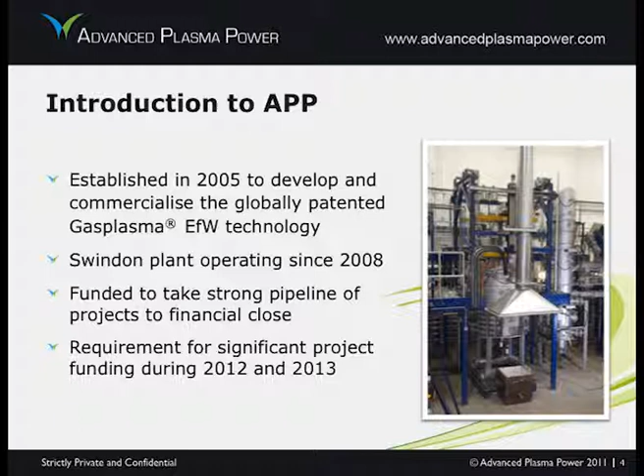Just briefly on Tetronics: it is a leader in DC plasma arc technology, having been established around 50 years ago and supplied some 80 systems globally in a variety of different applications. It has an extremely strong and mature IP portfolio and team of both technical and commercial staff.

Plasma technology, I will come on to explain, is obviously a key component in the gas plasma process, and Tetronics are our supplier for that component.

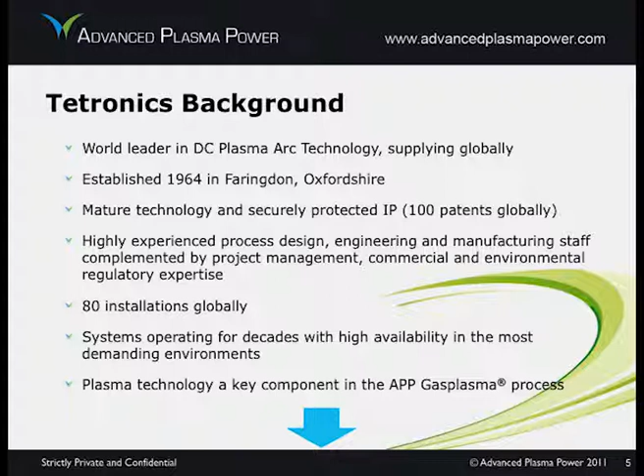The areas of application that the company has focused on historically include, obviously, waste to energy, which is the gas plasma application, but for many decades also the vitrification of incinerator residues, both bottom ash and APC (air pollution control residues, or fly ash), particularly in Japan, which were early adopters of thermal technology but also preferred to vitrify the incinerator waste, thus stabilizing it.

Tetronics has also worked for many years with the NDA and site license companies on vitrifying low and intermediate level nuclear waste, again to stabilize it and make it chemically inert, but also to reduce the volume of the arisings so as to make the material suitable for long-term storage.

Other industrial applications range from very problematic waste such as spent pot liner and organic pollutants, which themselves have an energy content where energy is recovered typically as steam to recycle back into those industrial processes, but also base metal recovery - for instance residues from stainless steel plants containing zinc, nickel, chrome and other heavy metals - to recover those metals as a valuable resource.

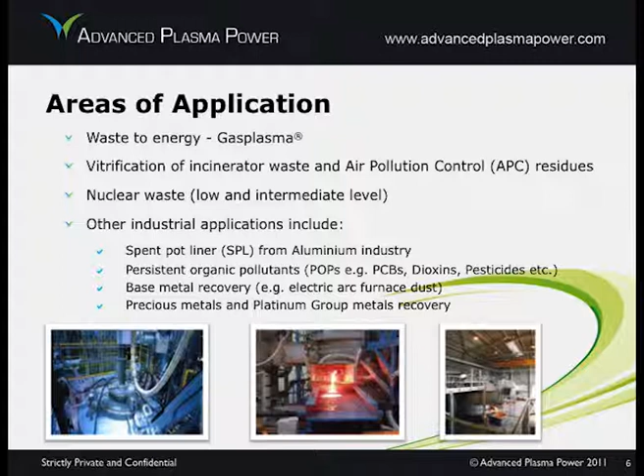Many references exist. So really, in the context of what we discussed earlier, APP and the gas plasma process really aim to address two global challenges. One is what to do with our problem globally of rising residual waste, whilst landfill capacity is in decline and our natural resources are in decline.

As already said, we embrace the shift from waste to resource management, seeing waste as a source of valuable resources, both in a material sense, but also in a fuel sense.

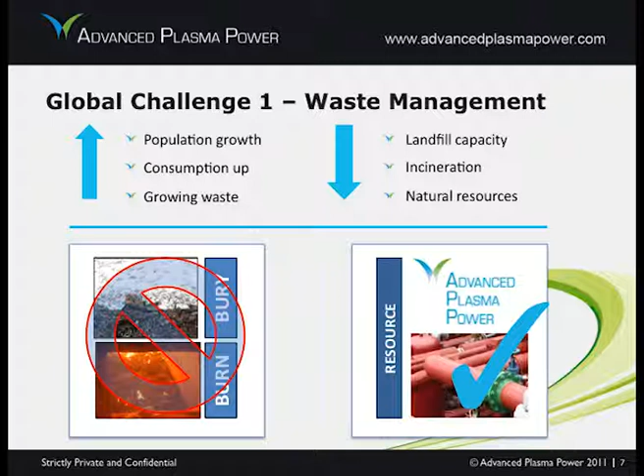Secondly, we seek to address the challenge of generating more secure, renewable, sustainable energy, addressing the need to tackle climate change and move to low carbon generation. We are a baseload generator as opposed to an intermittent generator, therefore we are not dependent on the elements in any way, and at a cost which is affordable both in capital and legacy terms.

Estimates put the contribution which energy from waste can make by 2020 at roughly the same sort of level as nuclear, but it can come online far more rapidly.

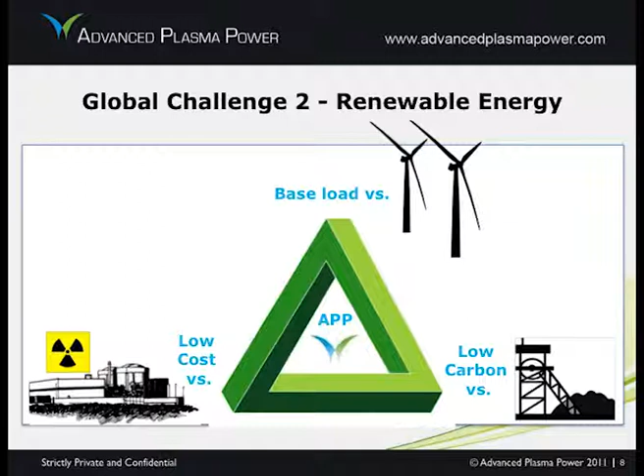Just to really set out the problem that is looming in terms of energy security: as our existing capacity goes offline, particularly coal stations going offline, there is a looming shortfall in energy generation capacity in the country, and clearly we need to address this urgently.

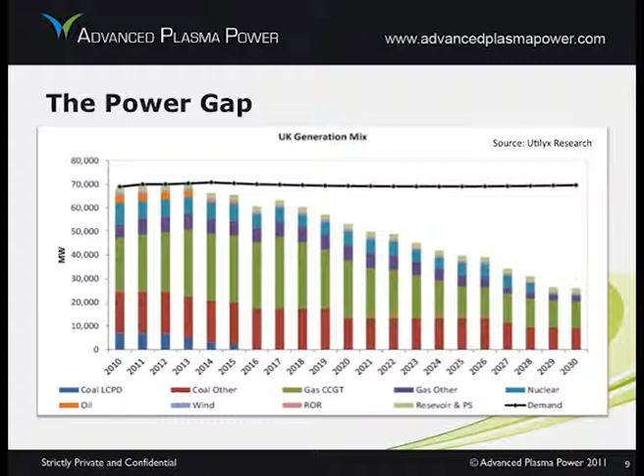Conventional energy from waste processes typically combust residual waste without any pre-sorting, and heat water to raise steam to drive a steam turbine to generate electricity inefficiently. This has inherent efficiency limitations, and the processes produce a high volume of residual ash requiring treatment or disposal.

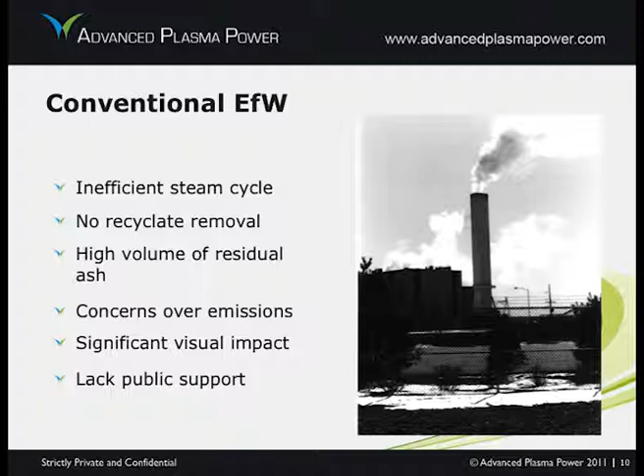There are certainly, in the public eye, concerns over emissions. The systems typically have a significant visual impact, being very large buildings, some 35 meters or so in height, with large stacks, again some 70 meters or so in height. And in the main, I think it's fair to say that the conventional processes generally lack public support.

So how are we different? I think it's summarised quite neatly by Fichtner, the leading consulting engineers who have undertaken extensive review and validation of our process. For many years, developers have been seeking ways of generating a gas from waste which could be used to power gas engines or turbines directly to produce electricity and heat. And we have overcome that obstacle, and I'll explain how we've done that.

The importance and significance of this is that we would, as a consequence, generate energy more efficiently. Typically, we benefit from greater support, both in the UK and overseas. And as I mentioned, as an ACT, Advanced Conversion Technology, or Advanced Gasification Technology, we do and would continue to benefit from 2 ROCs in the UK. Plants are smaller scale for reasons I'll explain, and also the process offers greater versatility in terms of producing products which have a variety of end uses and not just power generation.

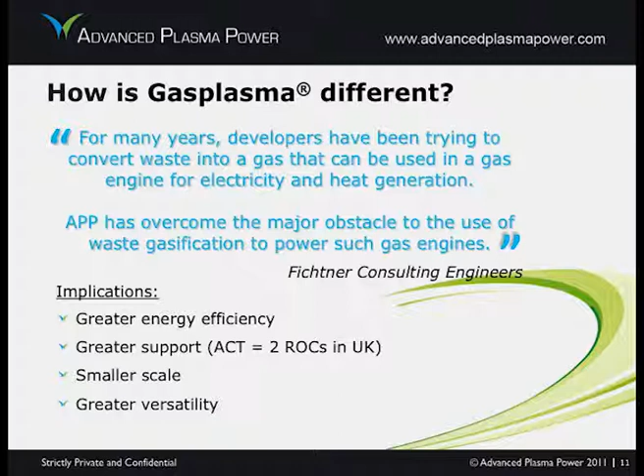So just to really highlight the energy conversion efficiency point I made, steam turbines generating electricity indirectly typically have an electrical conversion efficiency of between 18 and up to 25%, whilst using gas engines or turbines achieves significantly higher conversion efficiencies of between around 40 to 50%, especially when operated in combined cycle or with some energy recovery from steam in combination.

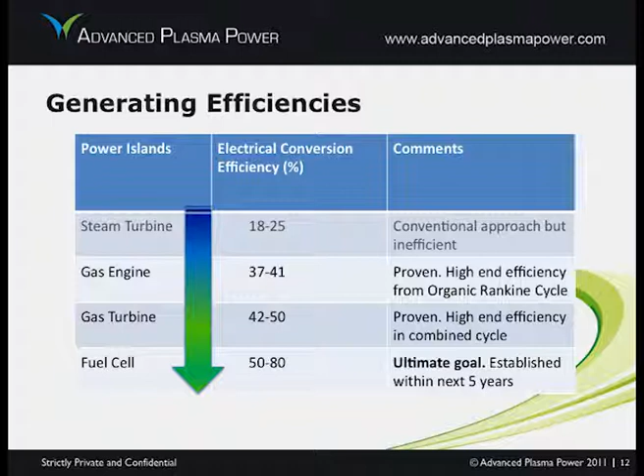But the ultimate goal really is to be able to generate electricity directly in fuel cells as fuel cell technology advances, as it will do certainly within the next 5-year horizon. And our process would produce a gas which could be used in fuel cells directly to generate electricity.

So what is the process? Well, we have really taken conventional, proven, widely deployed technology and combined it in an innovative way. So we have taken gasification, in our case a fluid bed gasifier supplied by a US company with over 100 fluidized bed references operating around the world.

That gasifier, after residual waste is pre-treated, so about 150,000 tons or so of residual MSW, municipal solid waste, or commercial industrial waste, having removed recyclates, shredded the material and dried the material to produce an RDF. We feed around 90,000 tons of RDF into the gasifier. This produces a crude or dirty syngas, as well as an ash. Typically the ash content is around 15%, so we might produce about 14,000 tons per year of ash.

Both the syngas and the ash are fed into a separate plasma converter, conventional plasma converter, as I said, treating about 14,000 tons per year, so it's therefore very much within the Tetronics reference plants, which typically operate on a much larger scale. And in the plasma converter, the ash is vitrified into a material which we have called Plasmarok, which is classified by the EA as a product, and has a variety of end uses as a building material. It can be cast into slabs or tiles or into blocks. It can be spun, for instance, as an insulating material, as a rock wool substitute, and these are all applications that we are exploring.

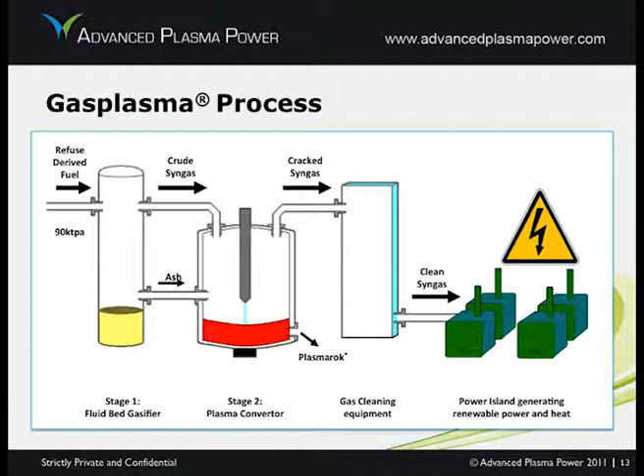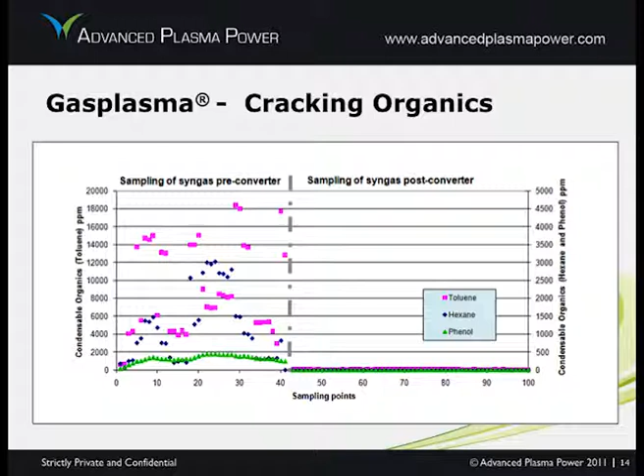I mentioned our suppliers, EPI, the US gasifier company, as well as Tetronics. Well, between them, they have some 180 references operating around the world, about 100 for EPI and about 80 or so for Tetronics, in a variety of applications and treating a very wide variety of feedstocks.

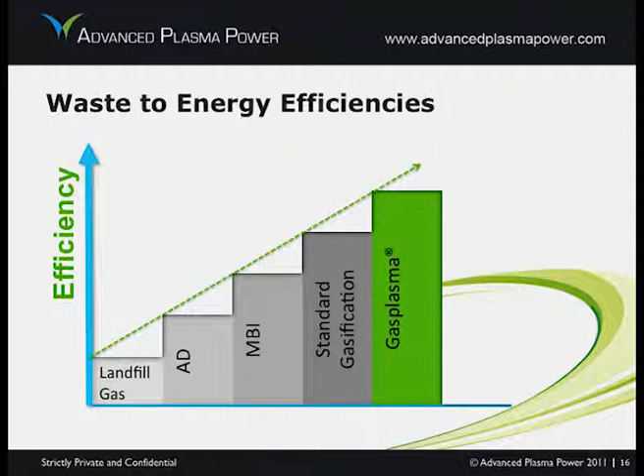Contrast that really with the same 150,000 tonnes of residual waste entering our process. We would extract some 40,000 tonnes per year or so of recyclates, which would be the metals, glass and dense plastics, which we remove at the front end; it doesn't even enter the process. And then the Plasmarok, the material we produce at the back end, which in itself is a recyclate with a variety of end uses.

And then obviously the point which I've made, I think quite strongly already, that the energy efficiency in terms of what's left, the use of the fuel, is significantly greater from our process, so generating, it depends obviously on the material entering, but in the order of 17 or so megawatts of power.

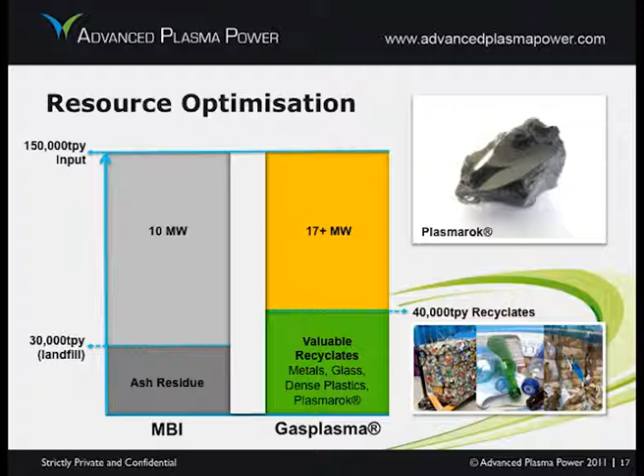So really, just to summarise the USPs for our process, resource optimization being key: both the recovery of recyclates, the production of recyclates and products, and the high net electrical efficiency. We really embrace also the shift to zero waste, in that we achieve almost complete landfill diversion. We don't have a residual ash. We produce Plasmarok, which is a product and not a waste, and for which there are a variety of end uses.

The process is proven. The equipment is in operation globally in many references. We have a plant here in Swindon which has been operating since 2008, and the process has been validated and undergone technical due diligence by a large number of advisors and contractors who have agreed to deploy our technology on a turnkey basis.

We also, last but by no means least, offer a low impact solution. What do I mean by that? Well, we don't use air in our process. We don't have an inert nitrogen loading throughout our process. We use oxygen and steam, and this means that the process is very small scale indeed. So typically it would fit into a standard industrial warehouse of about 15 meters in height, with a footprint, including the front end, of about 1.5 football pitches, and the stack, subject to local air dispersion modelling, of course, is typically about 10 meters above the roof height, so about 25 meters in total.

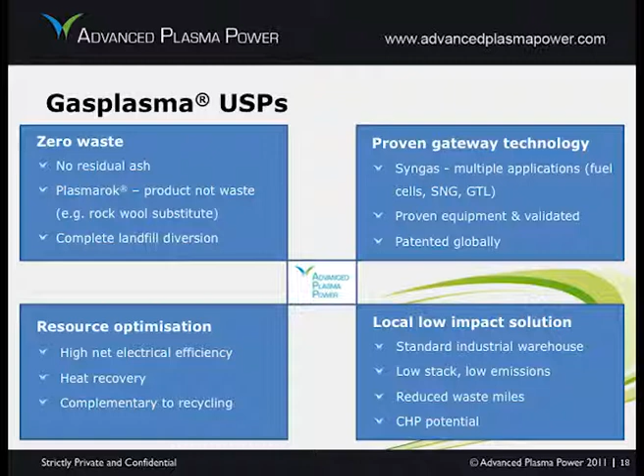So those are really the summary of the benefits of our process, and I really just wanted to open it up to questions, Maxine. Thank you very much for listening. Okay, that's great. Thanks a lot for that, Rolf.

Before we open it up to questions, we're just going to look at the results of our second poll, which was, what is the biggest barrier to greater uptake of EFW technologies? We have a bit of a mixed bag here. 49% of you say it's investor confidence, 33% say it's community buy-in, and 18% say it's the planning process. Now that's quite interesting, isn't it? Obviously, investor confidence, you have the current economic climate, which is very challenging. So how do we get the funding that's required, Rolf, do you think, in these times?

Well, certainly we're seeing a lot of appetite from investors to enter the market. And I think, as I've set out previously, there is a critical requirement to support the more advanced forms of generation, and to not make sudden changes to those support levels. But given that, we're seeing significant appetite, provided we can offer the kinds of investor returns